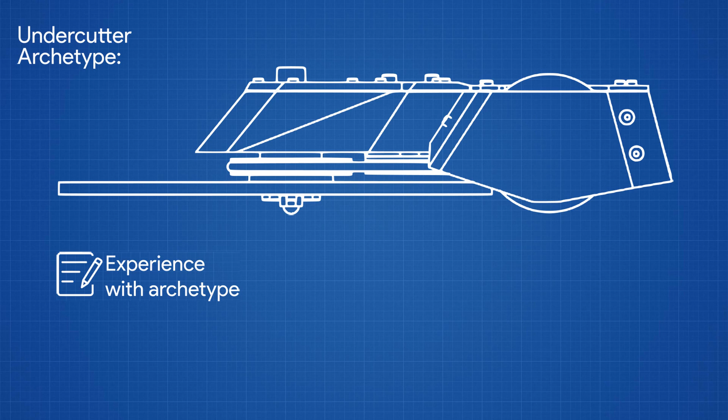This was mostly due to experience with the archetype, as my Antweight Pure D was also an undercutter, but also due to many other factors, such as the ease to 3D print the entire chassis in one piece for strength and ease of assembly, good invertibility, and the ability to hit low wedges, as well as purely my own aesthetic preference.

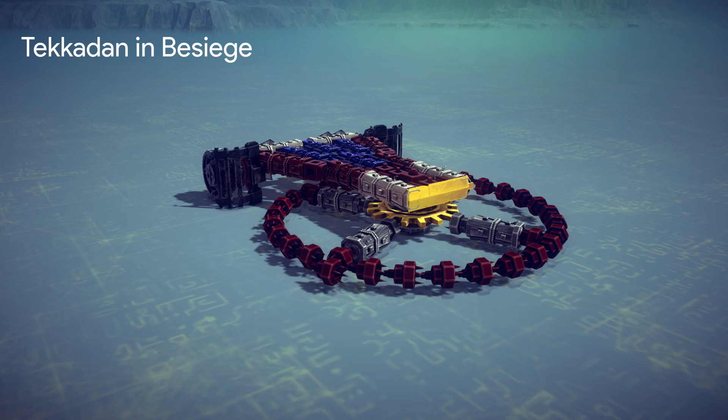For the theme of the robot, I was inspired by a design that I worked on with a friend in the physics sandbox video game called Besiege. This Besiege combat robot was also called Tekkadan, and that's where our Beetleweight robot got its name and color scheme from. Now, let's look at the CAD design I made in Fusion 360 of the final version of Tekkadan.

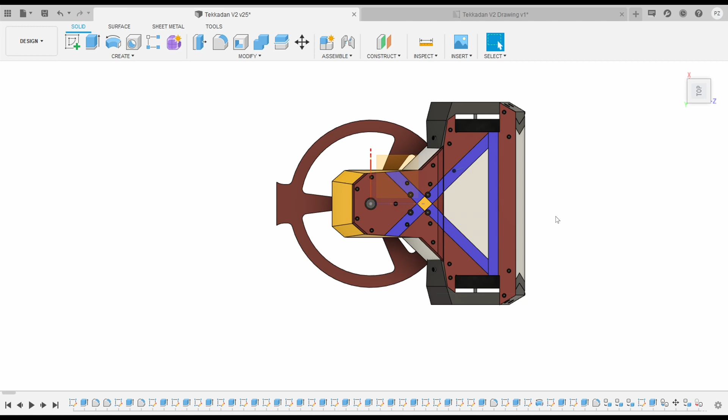Okay, now we're in Fusion 360. Let's begin the breakdown. First, let us start with the weapon system. And obviously, the most important part of the weapon system is this disc. So this is a new disc I designed for Tekkadan. It's a single tooth asymmetrical design.

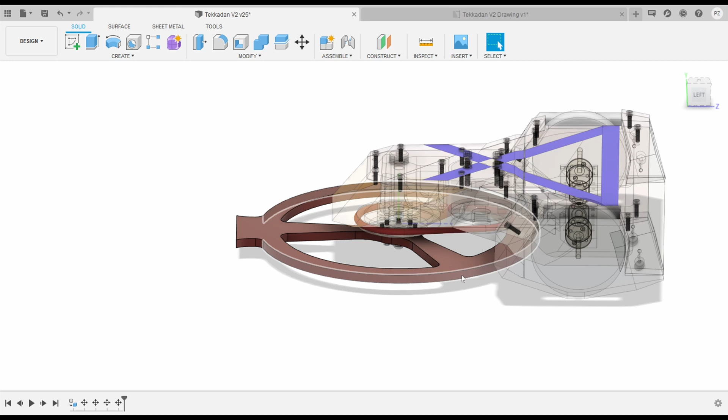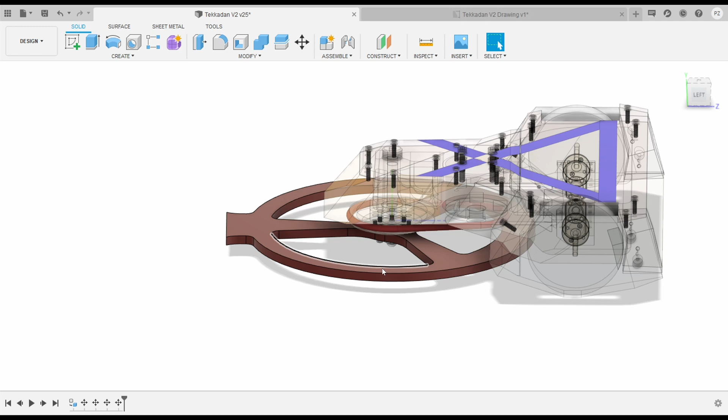It will be made out of 6mm AR500 abrasion resistant steel, which is a nice through hardened steel, and it will weigh approximately 431 grams. So that's 1/3 of a Beetleweight, basically. It's very hefty, it's a lot of weight, and that is because I wanted the requirement for relatively slow speed, around 9,000-ish RPM. I want to get at least 1.5 kilojoules.

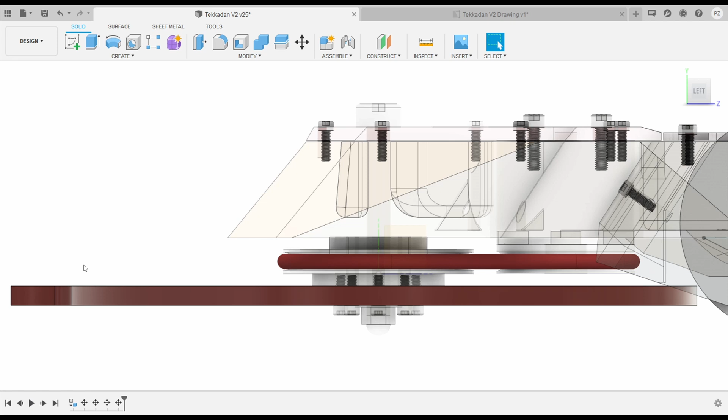And this spinner has quite a lot of moment of inertia because all of the mass is concentrated on the outside, and also because of how heavy it is. This is quite the heavy disc. What mounts it to the chassis is this central weapon shaft. So right here, this is a placeholder.

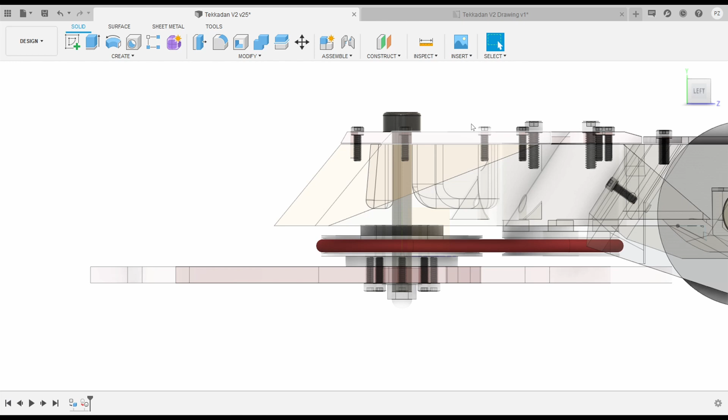I don't have actual CAD models of a lot of the parts here that are commercial because they're complicated, and it causes a lot of lag for the system, especially when I render. But this is supposed to be a quarter-inch shoulder bolt, and it has a hardened shoulder which can act as the central weapon shaft for the weapon system.

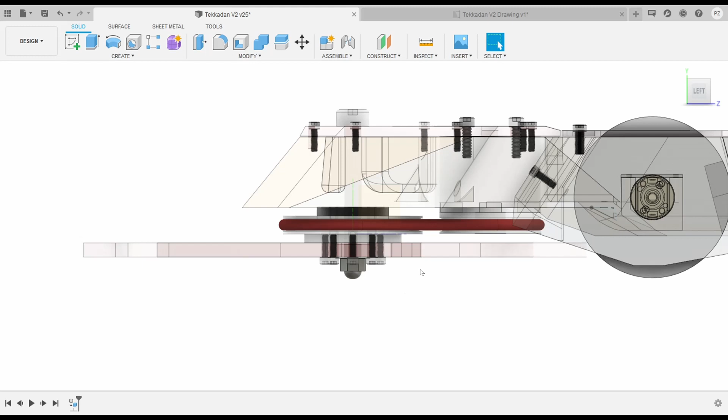What holds the weapon in is an acorn nut on the other side, which attaches onto the bolt, and this also acts as the skid pad for the front weapon. And what allows this weapon to spin freely are weapon bearings. So we have 2 weapon bearings for a lot of extra stability.

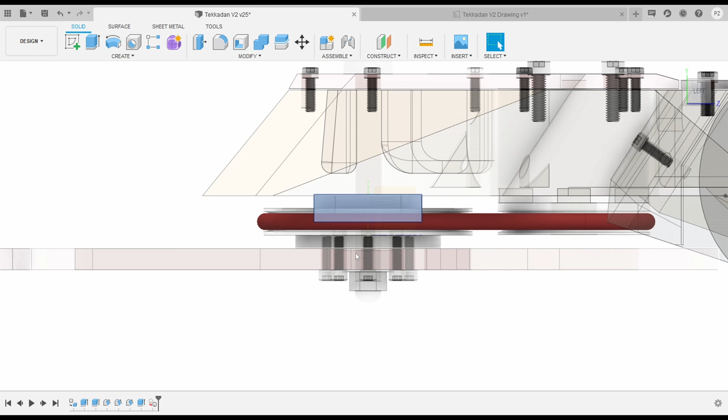One weapon bearing will be situated inside of the disc in a hole. The other one will be in a commercial bearing block. So right up here, this is a commercially available bearing block with a screw pattern, which allows these screws, 8 screws on the bottom. These 8 screws, they will hold the weapon to the bearing block and to everything in between. And in between, we have a spacer.

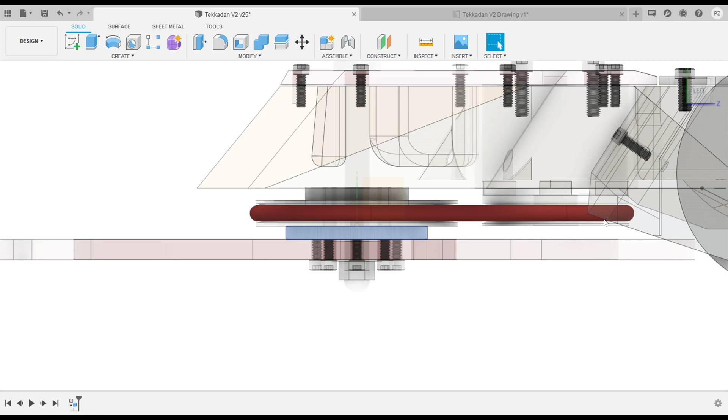So this spacer here, let me find it. Spacer. This will be made of aluminum. It will provide the space needed so the weapon doesn't hit our drive belt for the weapon. And of course the weapon side pulley. So this pulley is made of aluminum. It's also a commercial off-the-shelf pulley.

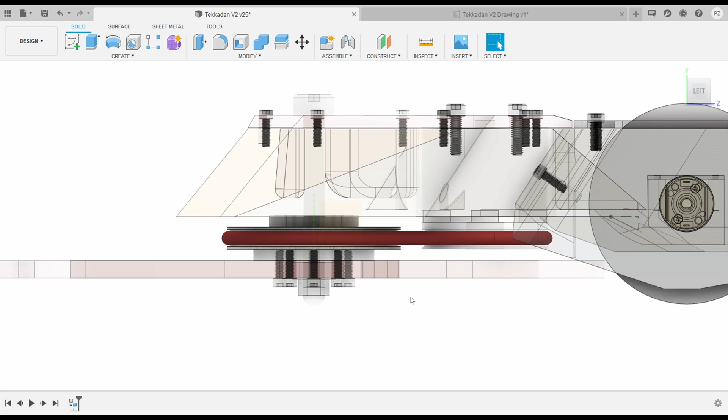And that's connected to the belt, which is then connected to the motor side pulley, which is how the motor can deliver all of its power to the spinner. And you can see here, the pulleys actually have a slight reduction. This is 18 to 25, so it's 18 on the motor side and 25 on the spinner side,

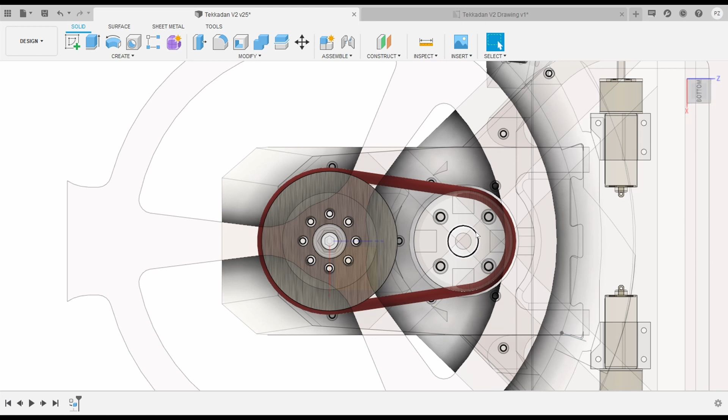because the motor is actually going to spin at about 12,000-ish RPM. It's 1100 kV, or 1100 RPM per volt, and we're running 11.1 volt or 3S lithium polymer batteries. At full charge, that's around 12.6 volts, and because there's the aerodynamic drag and friction and all of that, it's going to spin a little bit slower than theoretical. So with that and this gear reduction here, the spinner is going to be spinning at about 9,000 RPM, which is what we really want.

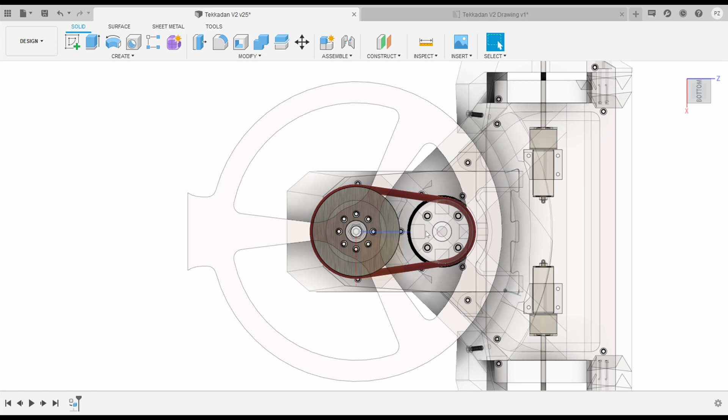Okay, that aside, we have the motor pulley, which mounts directly onto the can. So this is the motor pulley. It has some notches cut into it. This is designed to mount directly into the motor, because the motor itself will have little cooling ports on the bottom where the notches will fit right into.

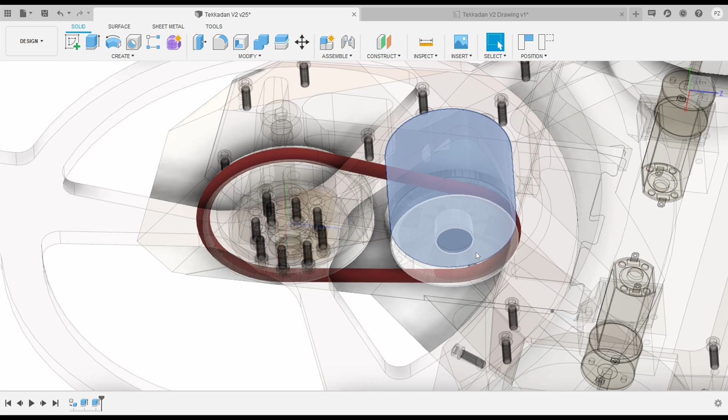This motor here is just a placeholder, but this will be a 420 watt motor, and again it's 1100 kV. So in theory, with 420 watts and a theoretical energy of about 1.7 kilojoules, it's going to take a little bit more than 4 seconds, probably, accounting for some aerodynamic drag, to spin up to top speed.

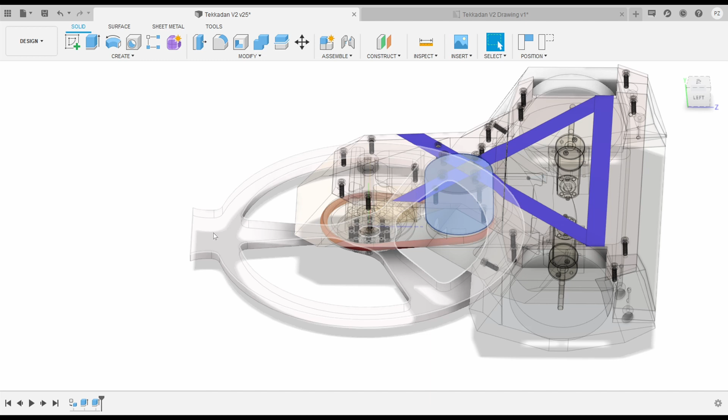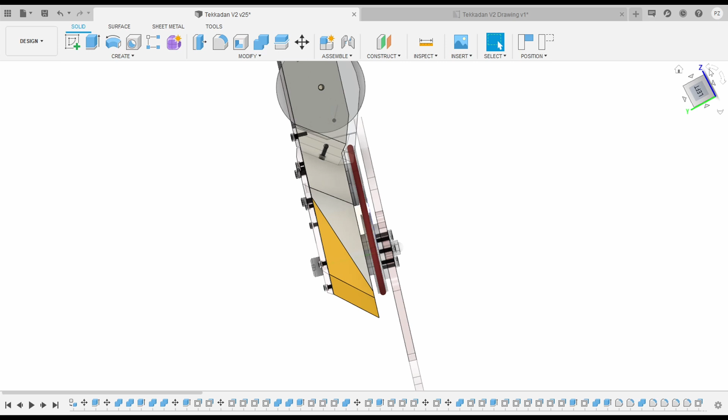And yeah, that's the motor. Now let's talk about the chassis. So this is the unibody tub chassis that the entire robot is centered around. It will be 3D printed in one single component, actually upside down. It'll be 3D printed like this, where it's flat to the printing bed. And this is what the entire robot is built around.

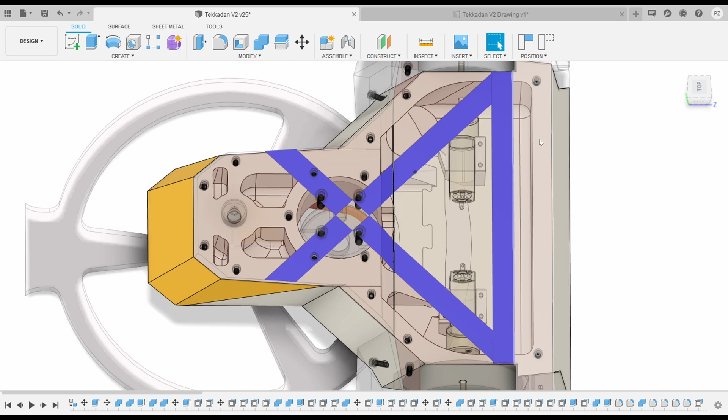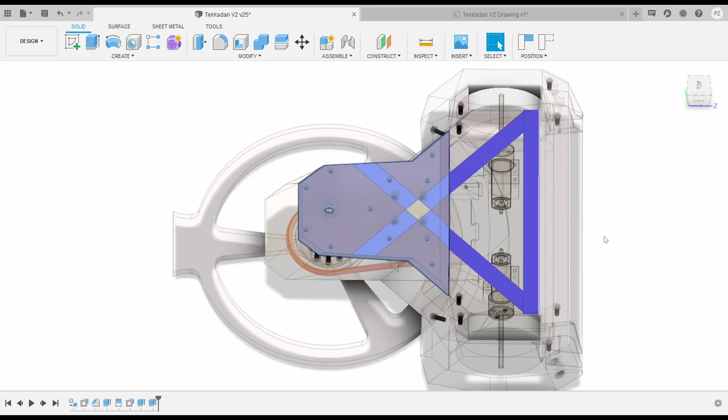As you can see, down here there's the hole for the shoulder bolt to go through. There's all the mounting holes for the top panel, the electronics bay to hold all of the electronics, such as the battery, speed controllers, the receiver, and also the 2 drive motors. We'll get to them later. But most importantly, what mounts onto these, I feel like, are the top panels. The top panels consist of 2 pieces, the front top panel here and the rear top panel here.

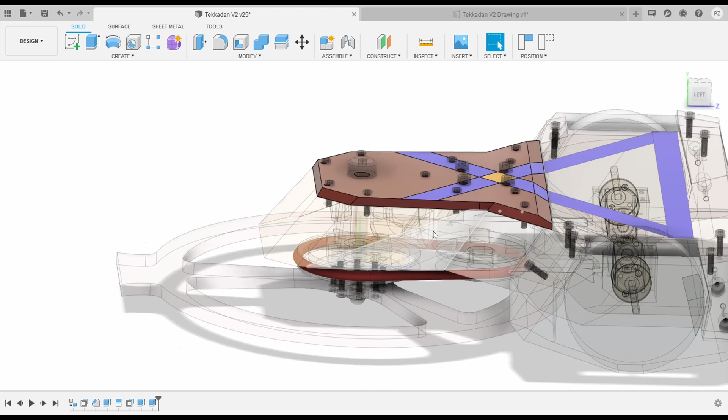The front top panel is actually very important because it's what the weapon motor actually mounts onto. As you can see, there's slightly larger screws here. Those are actually CAD-ed screws. Those are what attaches the motor to the top panel, and the top panel is then attached onto the chassis, which is what attaches this motor onto the robot.

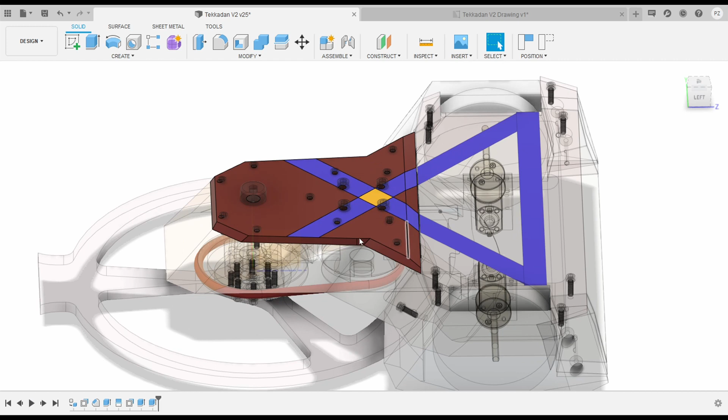This is a similar design to my antweight Pure D, which also has a motor attached to the top panel. It allows for some extra give, a little bit of shock mounting per se for the motor. Makes it a little bit safer. And also, of course, the head of the shoulder bolt sits on top of the top panel.

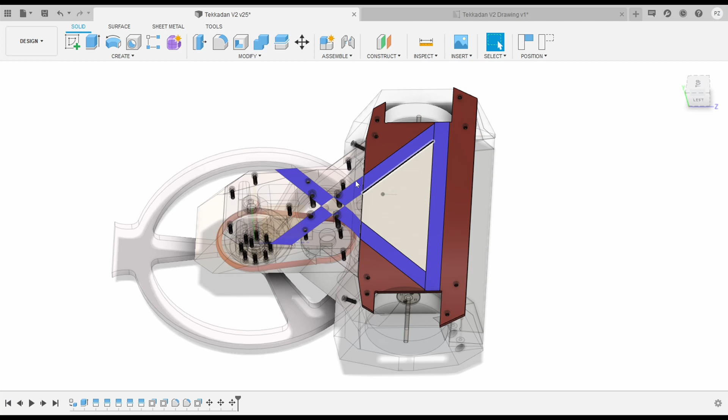And now let's get to the rear top panel. The rear top panel doesn't have as many features. It's mostly just a piece of armor. These top panels will also be 3D printed, of course, but they do actually mount both onto the chassis and also onto the wheel guards. So let's look at one of these wheel guards. Come on, Fusion, load. Okay, here we go. Let's look at one of these wheel guards.

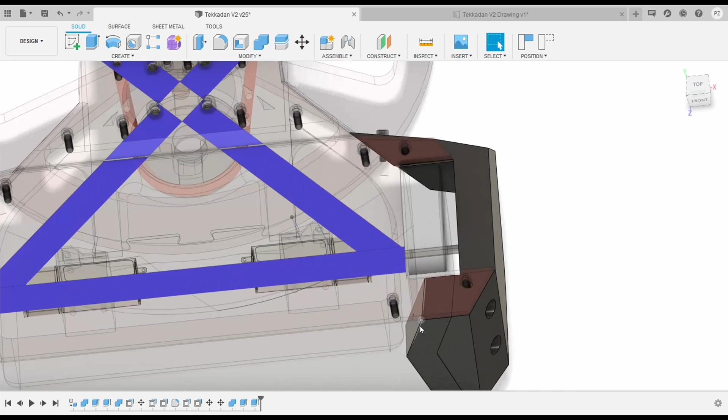So as you can see, some of the mounting holes go from the top panel, which helps with a little bit of extra stability and a little bit of extra integrity, I guess. But it's mainly mounted onto the chassis via screws. We got a screw hole in the front that mounts into the chassis, and 2 here in the back, which mount onto the back armor of the chassis.

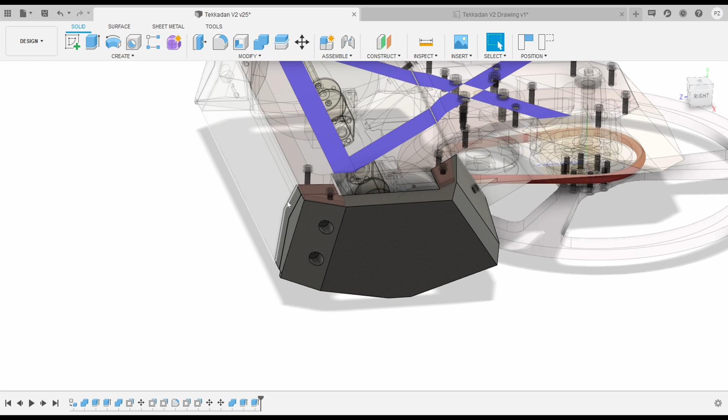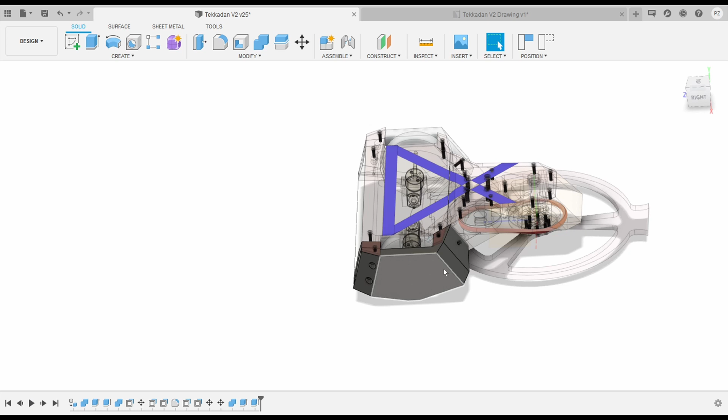And these wheel guards are supposed to protect the wheels, obviously, from impact, also from enemy spinners. And they're also an aesthetic element added to make the robot look a little bit bigger, and of course to cover up the exposed wheels. Alright, so those are the chassis elements. Let's get to the drive.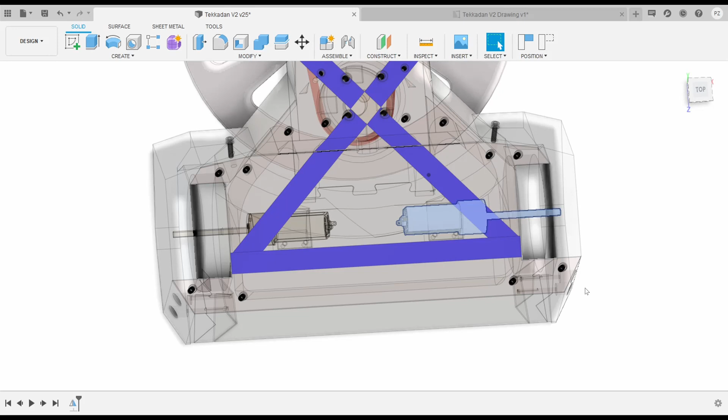So as you saw in the chassis, we have mounting points for drive motors. And the choice of drive motor are these Fingertech Silver Spark motors. These are standard Fingertech commercial off-the-shelf motors that you can buy. They're usually meant for combat robotics, and supposedly they're pretty durable.

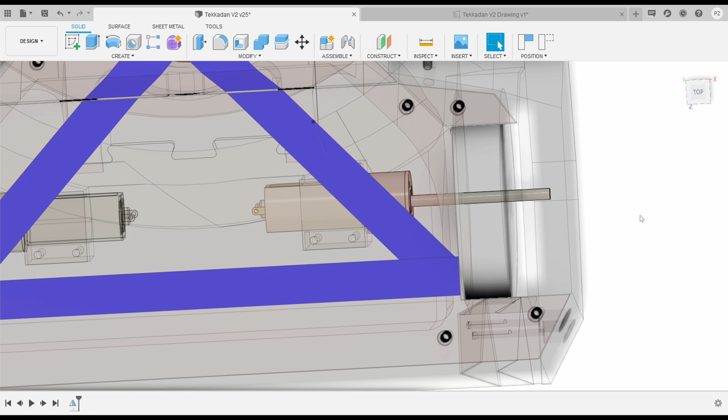And the ones I ordered are 30-to-1 ratio, so they're going to be spinning quite fast with an 11.1 volt power system. But that's good. We want a lot of mobility, and they're not going to have as much torque as, say, a 50-to-1, but since we're not a push bot, we don't need to push, we just need to get the spinner to the enemy. I think 30-to-1 is a good choice.

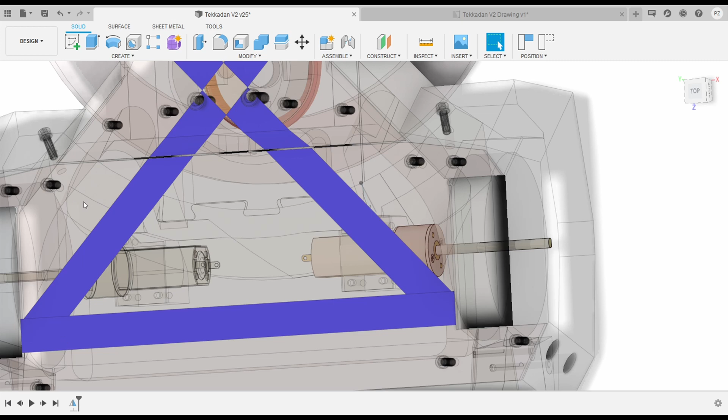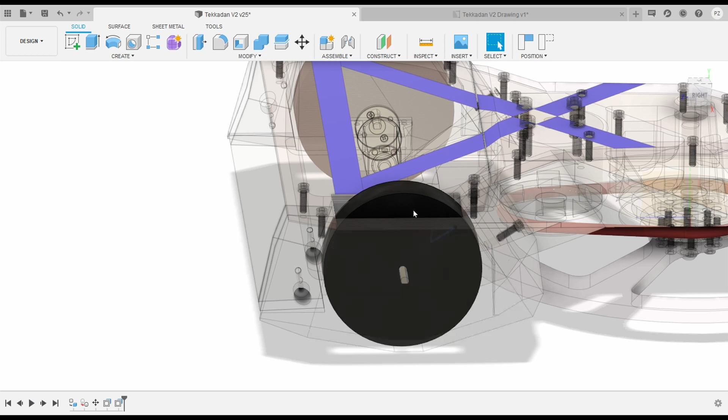And mounted onto that motor, of course, are the wheels. The wheels we have are also made by Fingertech. These are 2.25 inch foam wheels made of neoprene. They're very good at absorbing shock. They're not that grippy, but I hope to coat them with a little bit of silicone, which will improve the grip quite a lot. But they're not the best at taking hits, but that's why we have the wheel guards here.

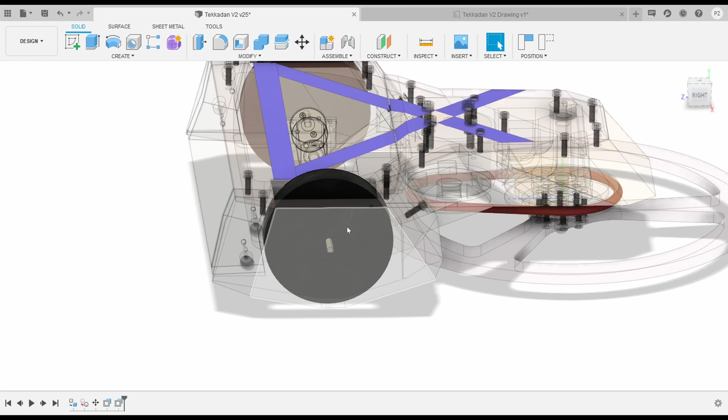These are good at absorbing shock, so in case of a hard landing, it won't bend the motor shafts for drive. It won't bend the drive shafts, and it won't shock the electronics too hard. That's all we really need for a robot like this, where it's going to be going in for impacts with the spinner. And yeah, those are foam wheels.

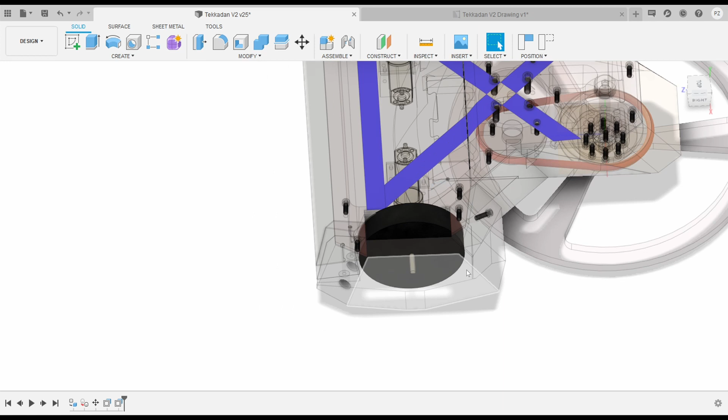They're going to be mounted onto the motor via Fingertech twist hubs. However, I just didn't bother to CAD them. They're going to be there. They're pretty light, made of aluminum. And yeah, that is the drive system. This concludes the breakdown today.